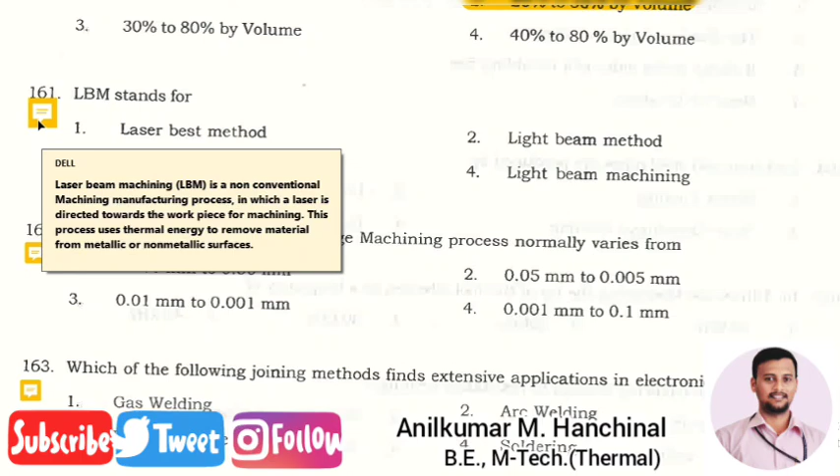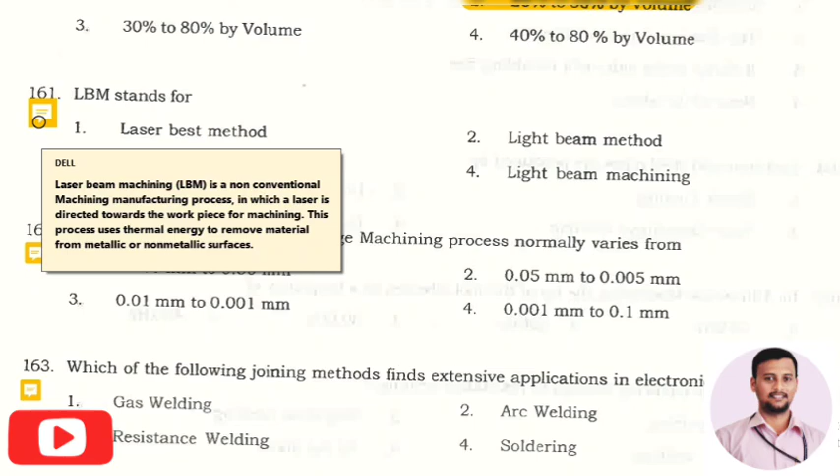Next question: LBM stands for? The right answer is option 3, laser beam machining. Laser beam machining is a manufacturing process in which a laser is directed towards the workpiece for machining. So LBM stands for laser beam machining.

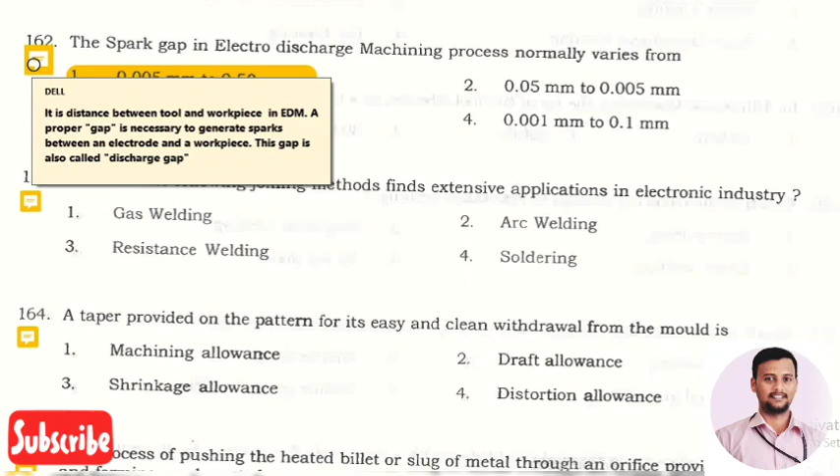Next question: the spark gap in electro discharge machining process normally varies from? The right answer is option 1, that is 0.005 mm to 0.5 mm. So what is this spark gap? It is the distance between the tool and the workpiece in EDM, electro discharge machining. A proper gap is necessary to generate the spark between electrode and workpiece, and that gap should be around 0.005 mm to 0.5 mm.

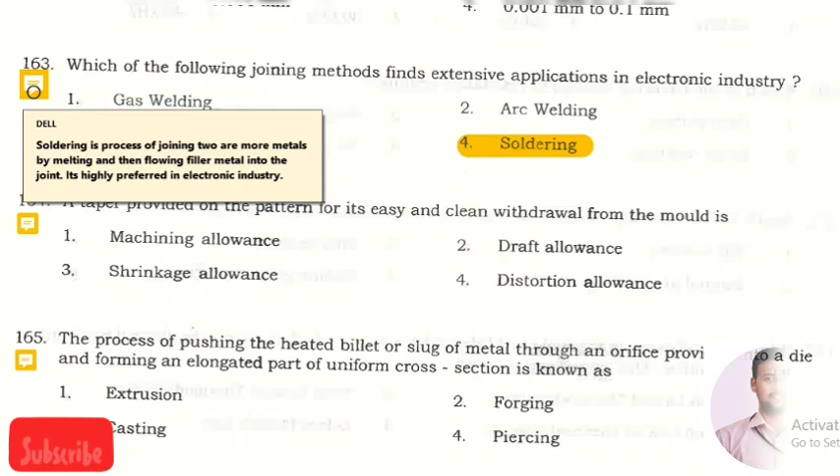Next question: which of the following joining methods finds extensive application in the electronic industry? The right answer is option 4, soldering. So what is this soldering process? It is a process of joining two or more metals by melting and flowing a filler metal into the joints, and it is highly preferred in electronic industries.

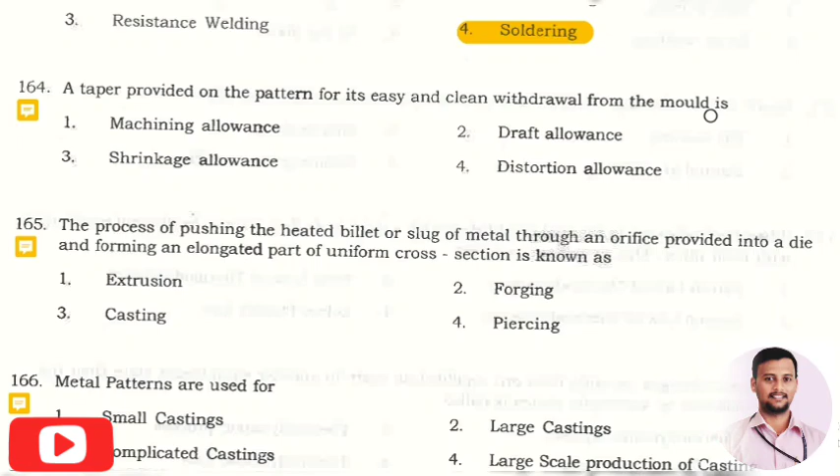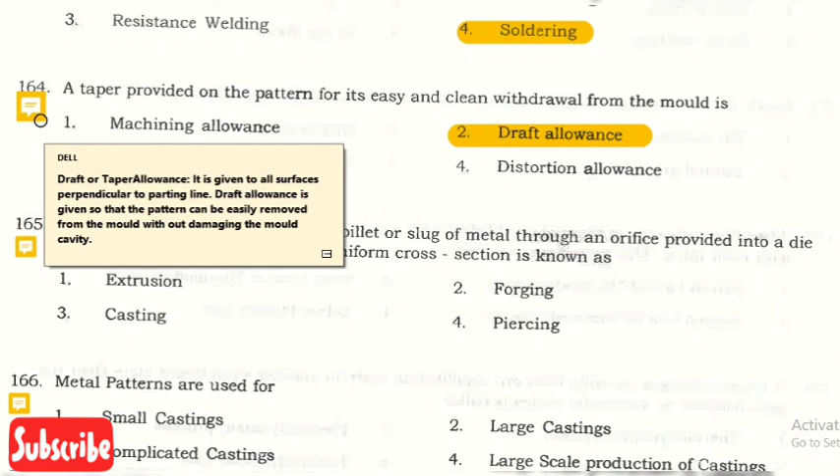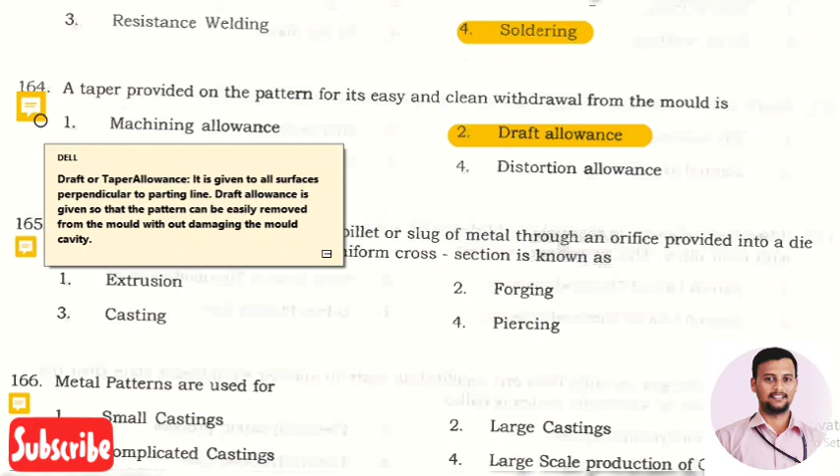Next question: a taper provided on a pattern for easy and clean withdrawal from the mold is called? The right answer is option 2, draft allowance. So what is this draft allowance? The draft or taper allowance is given to all surfaces perpendicular to the parting line, so that the pattern can be easily removed from the mold without damaging the mold cavity.

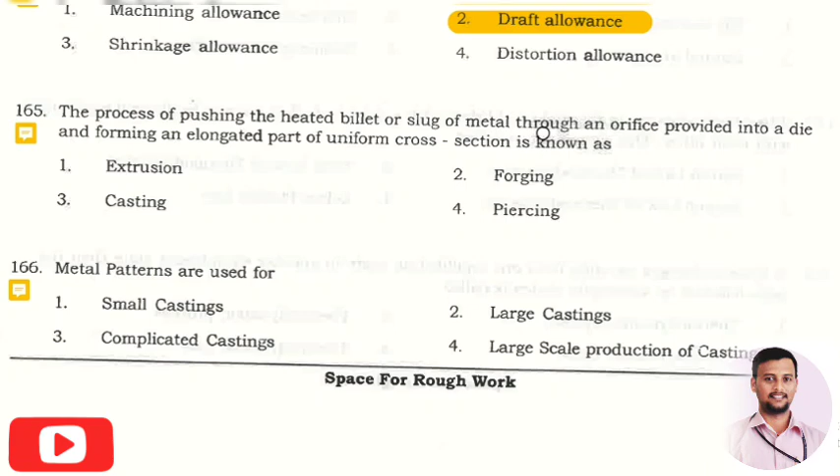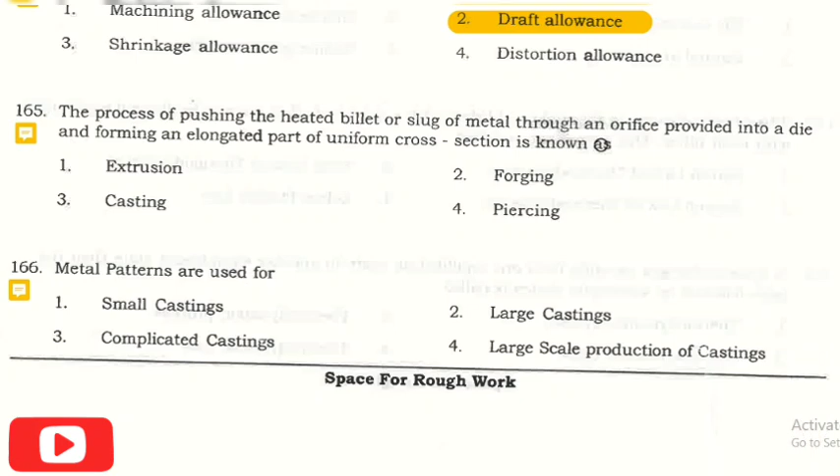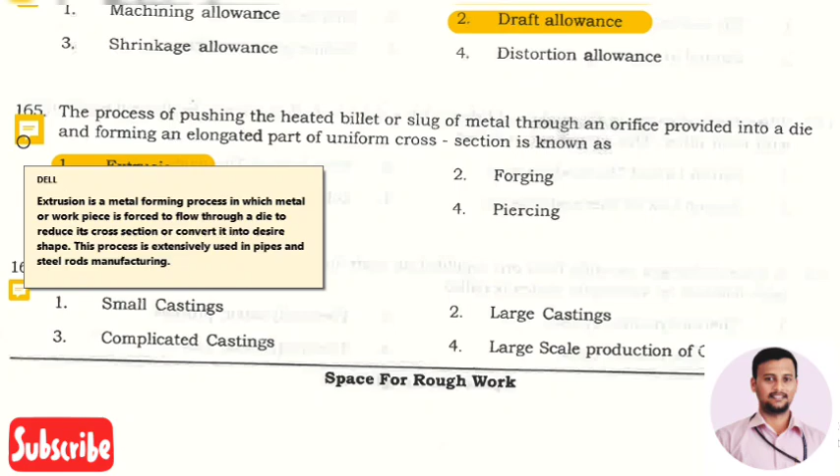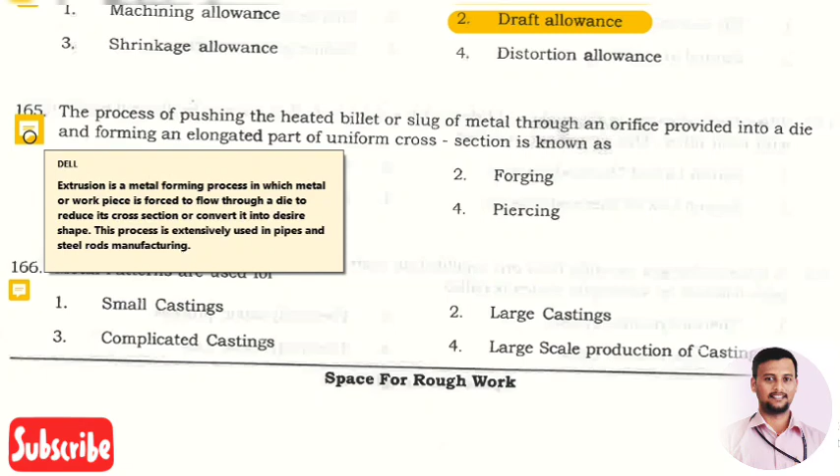Next question: the process of pushing a heated billet or slug through an orifice provided in a die, forming an elongated part of uniform cross-sectional area, is known as? The right answer is option 1, extrusion. Extrusion is a metal forming process in which the metal or workpiece is forced to flow through a die to reduce its cross-sectional area or convert it into a desired shape. This process is commonly used for pipe and steel rod manufacturing.

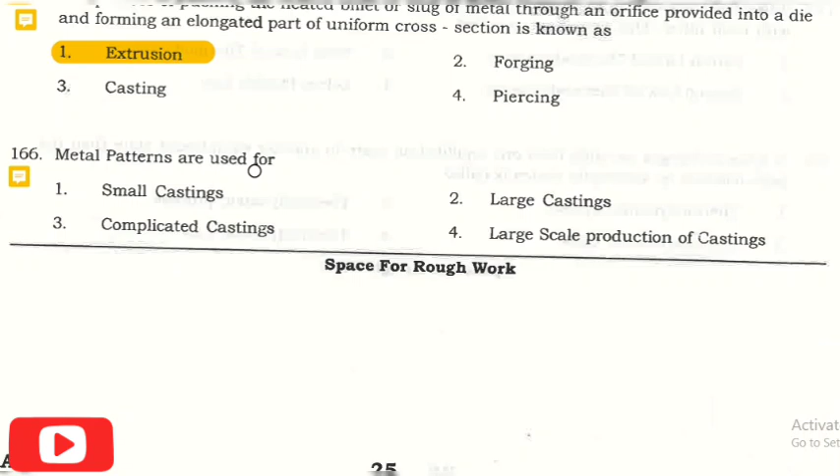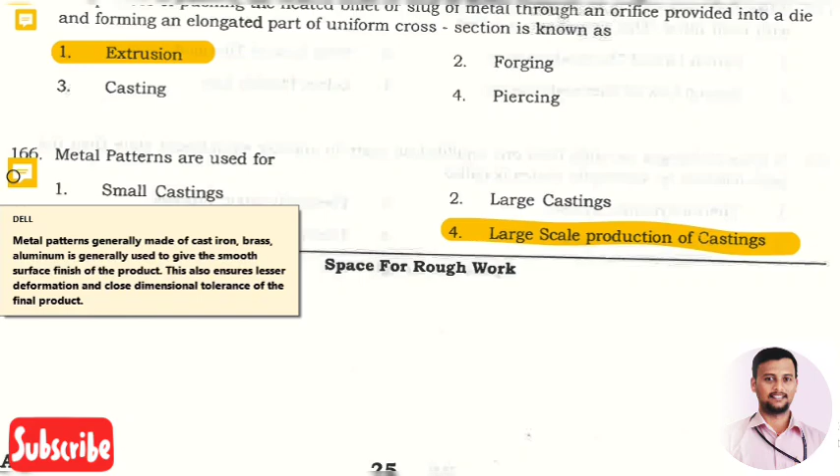Next question: metal patterns are used for? The right answer is option 4, large scale production casting. Metal patterns are generally made of cast iron, brass or aluminium, and are used for a smooth surface finish of the product. This also ensures less deformation and close dimensional tolerance for the final product. So in a foundry industry, metal patterns are used for large scale production of casting.

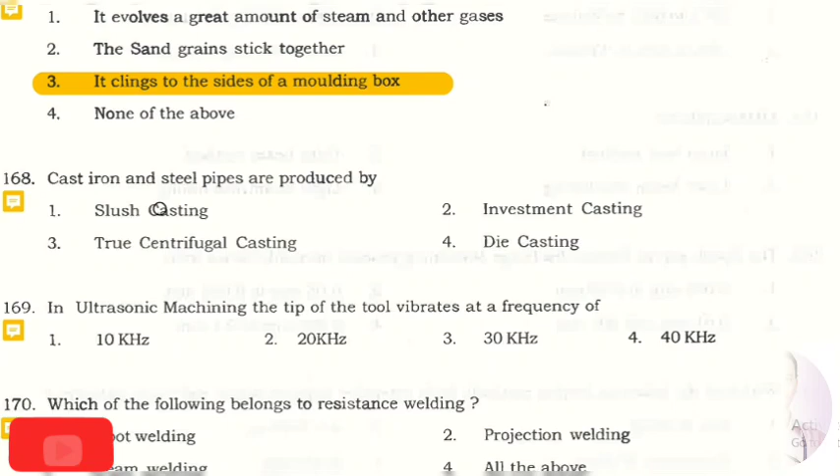Next question: cast iron and steel pipes are produced by? The right answer is option 3, true centrifugal casting. So what is this true centrifugal casting? It is a metal casting technique that uses the force generated by centripetal acceleration to distribute the molten metal into the mold.

Next question: in ultrasonic machining, the tip of the tool vibrates at a frequency of? The right answer is option 2, 20 kHz. In ultrasonic machining, the tool of a desired shape vibrates at an ultrasonic frequency of about 19 to 20 kHz, and the amplitude of this vibration is 15 to 50 microns over the workpiece.

Next question: which of the following belongs to resistance welding? The right answer is all of the above - spot welding, seam welding, and projection welding all come under resistance welding. So what is this resistance welding? It is the joining of metals by applying pressure and passing current for a length of time through the metal area which is to be joined.

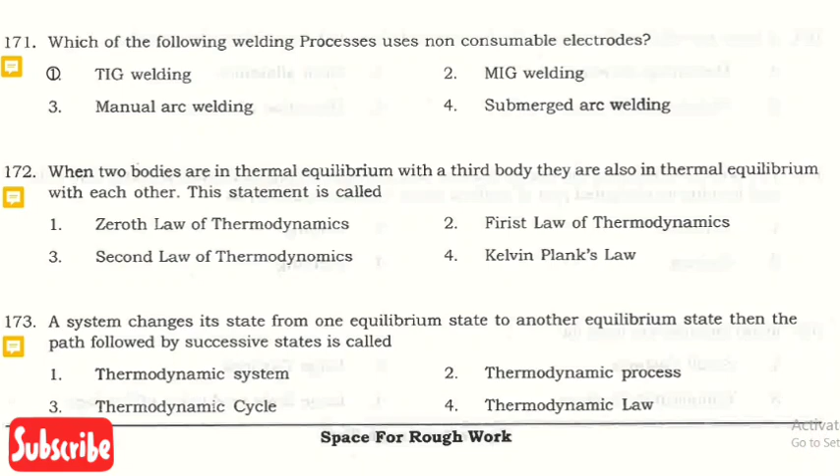Next question: which of the following welding processes uses non-consumable electrodes? The right option is option 1, TIG welding.

What are non-consumable electrodes? These are electrodes that are not consumed during the process of welding. In TIG welding, that is tungsten inert gas welding, non-consumable electrodes made up of tungsten are used.

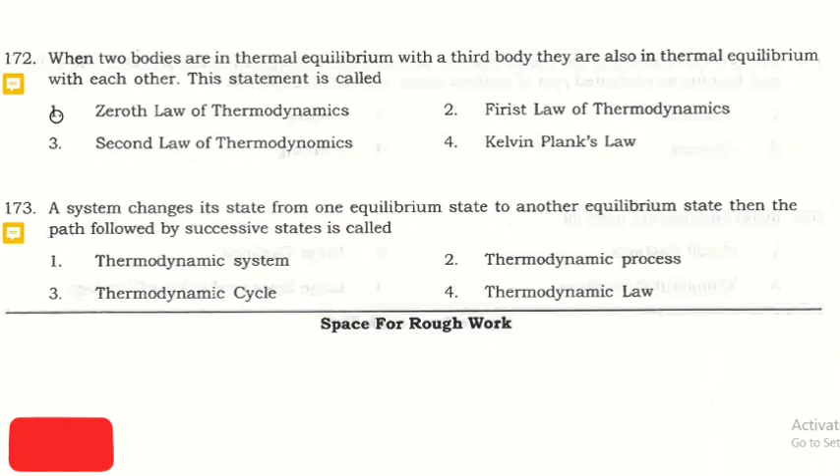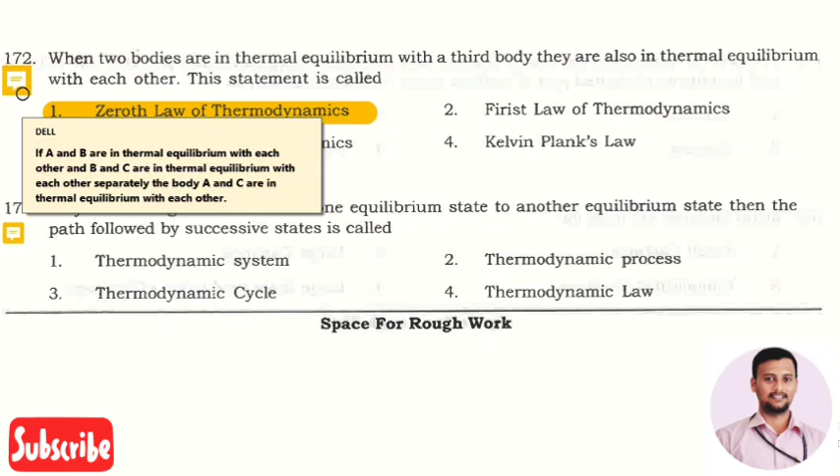The next question is: when two bodies are in thermal equilibrium with a third body, they are also in thermal equilibrium with each other. This statement is called the zeroth law of thermodynamics. It says that if A and B are in thermal equilibrium with each other, and B and C are in thermal equilibrium with each other separately, then A and C must also be in thermal equilibrium with each other.

The next question is: a system changes its state from one equilibrium state to another equilibrium state. The path followed by successive states is called the thermodynamic process. It is the passage of a thermodynamic system from an initial to final state of thermodynamic equilibrium - nothing but the change of a system from one equilibrium to another equilibrium.

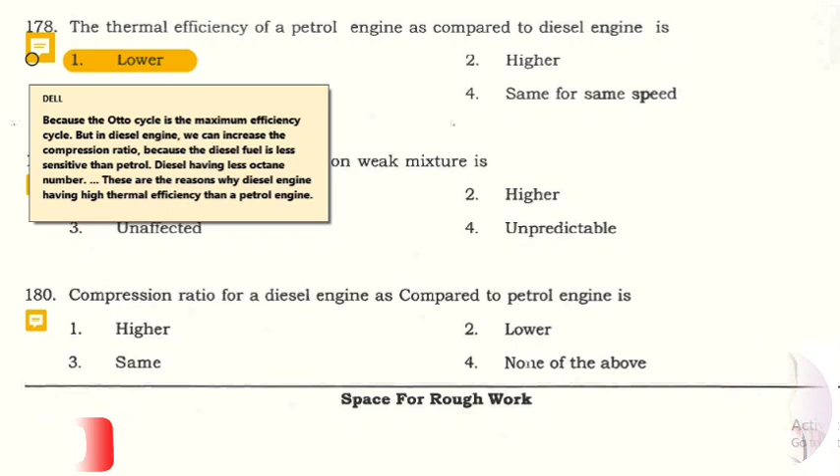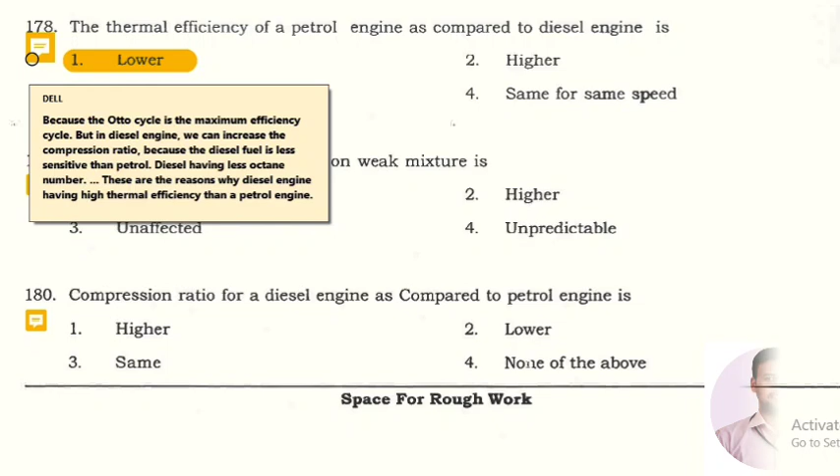The next question is: the thermal efficiency of a petrol engine compared to a diesel engine is lower. This is because the Otto cycle has a maximum efficiency limit, but in a diesel engine we can increase the compression ratio since diesel fuel is less sensitive than petrol. Diesel has a lower octane number - these are the reasons why diesel engines have higher thermal efficiency than petrol engines.

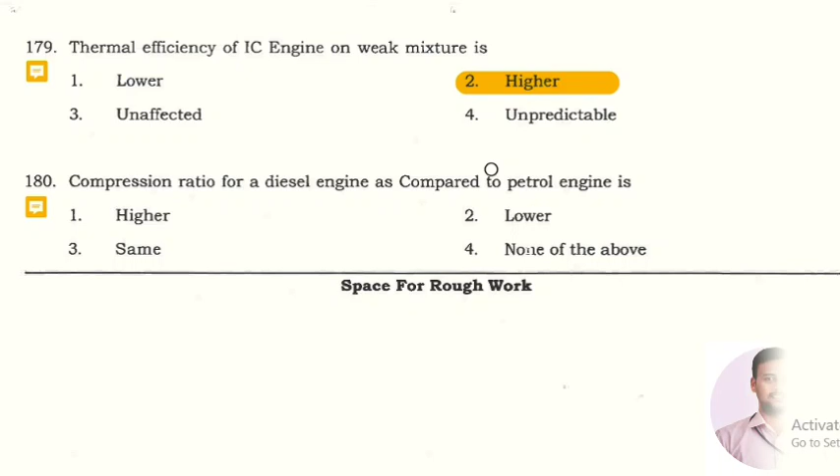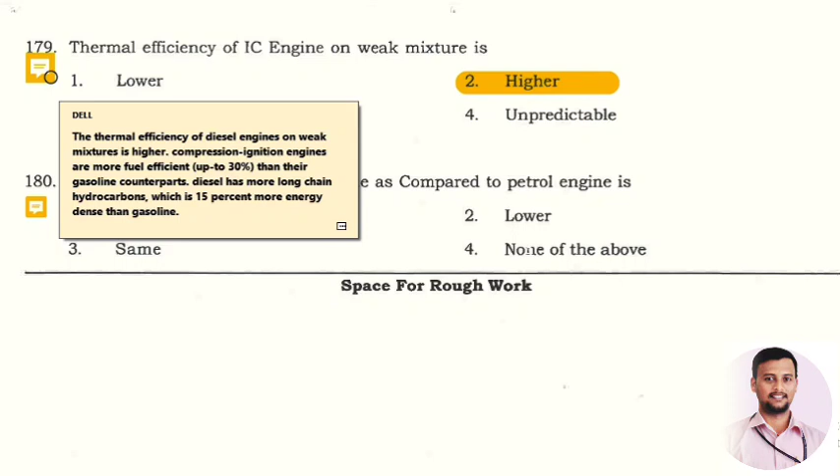The next question is: the thermal efficiency of an IC engine on a weak mixture is higher. Compression ignition engines are up to 30% more fuel efficient than gasoline engines. Diesel engines use longer chain hydrocarbons, which are 15% more energy dense than gasoline, making the thermal efficiency of an IC engine on a weak mixture higher.

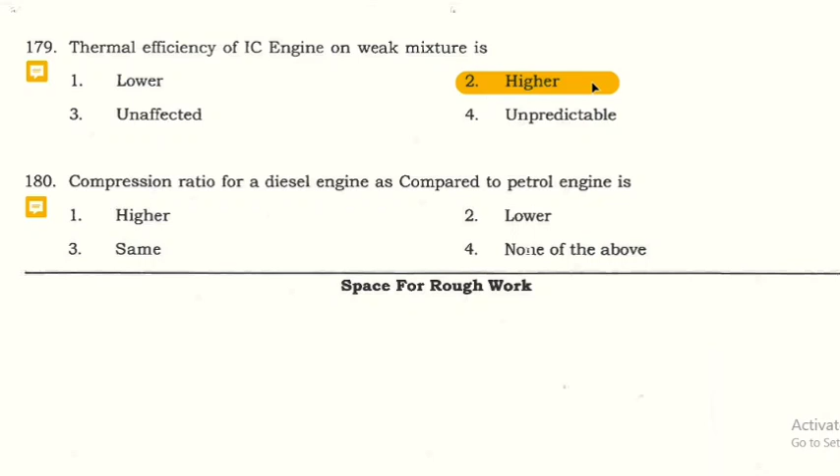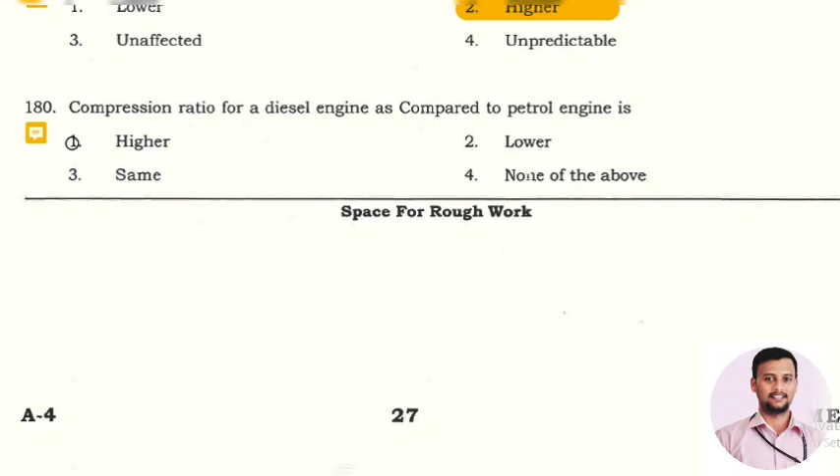The last question is: the compression ratio for a diesel engine compared to a petrol engine is higher. Diesel engines are designed to operate at higher compression ratios, usually between 15 to 20, whereas petrol engines are designed for a lower compression ratio, between 8 to 10.